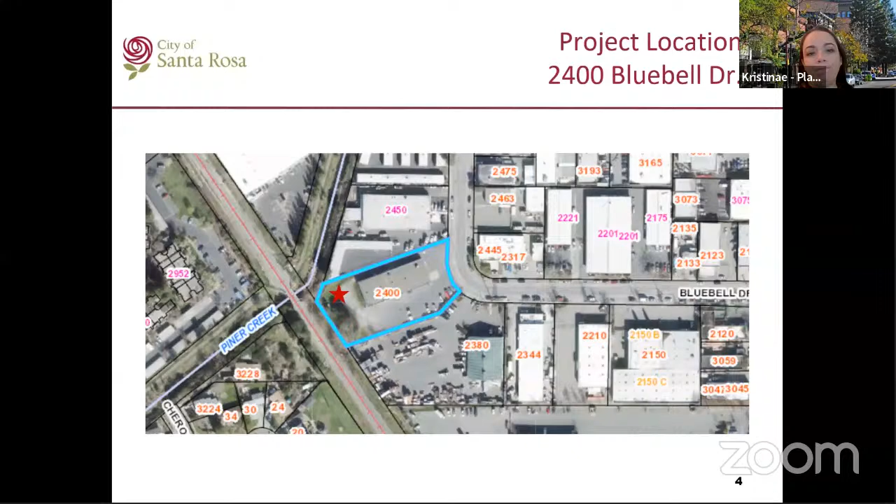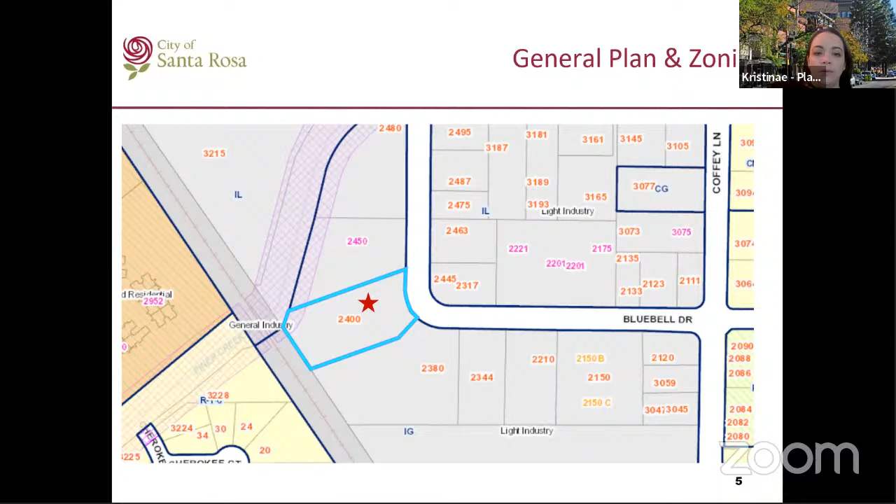A small portion of the lot is directly adjacent to Piner Creek, and the rear portion of the lot is adjacent to Smart Rail. The general plan and zoning for the lot and the surrounding area on the east side of the tracks is light industry and light industrial. Here's a close-up view showing the Piner Creek buffer.

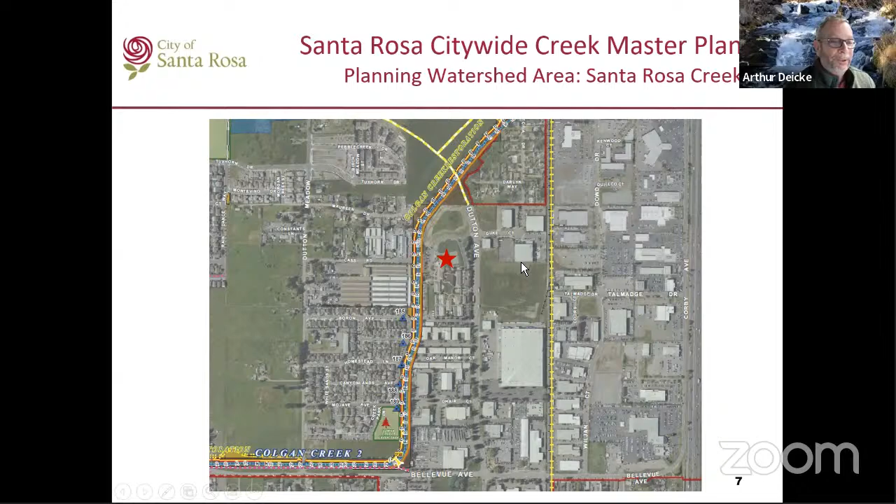And here is the... get this out of the way. The planning watershed area for the Santa Rosa Creek showing... oh, this is the wrong map, I apologize. There's Colgan Creek. Sorry, this is incorrect. So let me talk about Piner Creek Reach 2, which is directly adjacent to the project site.

It's designated as a modified natural creek, a modified creek and culvert consisting of approximately 7,430 linear feet. The creek is in a culvert from Highway 101 to Airway Drive, where it daylights as a modified natural type channel. Downstream of the confluence with the North Fork of Piner Creek, the creek is owned and maintained for flood control by the Water Agency.

Between Coffey Lane and the railroad tracks, the access road is not open to the public, and I don't believe there are any plans to open that anytime soon. Habitat enhancement is recommended throughout the reach, involving removal of invasive species and replacement with native vegetation.

Here's the applicant's site plan. It's showing the trenching for the underground electrical supply, and the equipment shelter would be towards the rear along with the cell tower. He's showing the Santa Rosa Creek.

Here's a little bit of a close-up. It's hard to see on this PowerPoint, but he does show a setback to the creek, to the fence of the equipment shelter. And I believe it's 25 feet, if I read that correctly, from the edge of the creek to the fence.

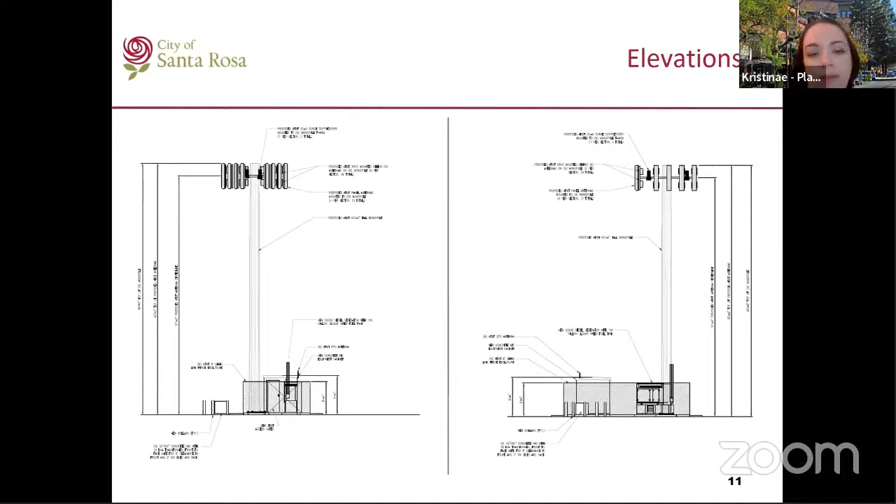And here is elevations of the proposed tower. It would be 60 feet tall with an antenna array. And you can see the equipment shelter below that would house a standby generator and various equipment that's needed to operate the tower.

So as I stated, there would be two opportunities for the public to comment and participate on this project. There's a major conditional use permit that the Planning Commission would review, and a major design review that the Design Review Board would review. And if you have any questions, I'm available to answer them. I don't believe my applicant is here, but I can relay your comments to him if he is not.

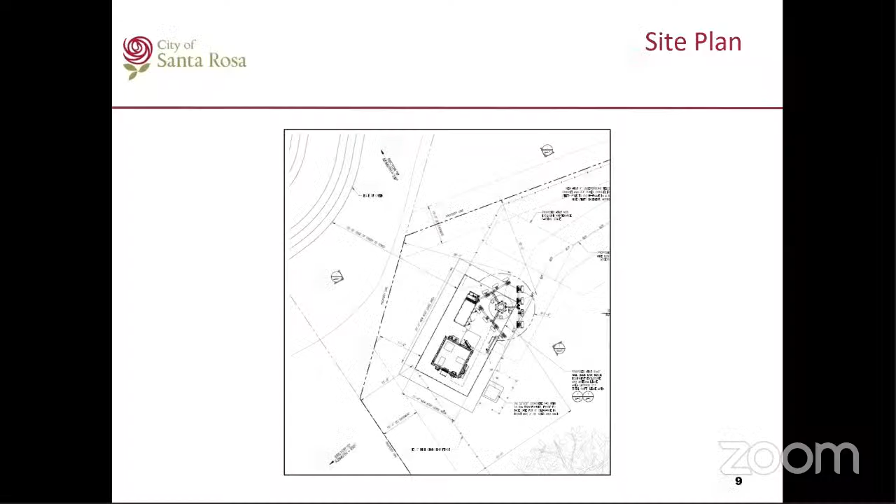Are you talking about the photo simulation? I'd like to see that because it wasn't in my packet. It's labeled the site plan, on page 9 of PDF page 9. Can we put that up? Let me get the actual plans rather than my PowerPoint. No, I want yours in this case because they don't match. Is this the one? That's not the one I have. Okay, can you go up one more? Just cycle through the slides until we find the one I'm looking for.

Yep, that's it. Okay, so it's labeled Santa Rosa Creek. Yes. So why is that? I noticed that too. This was prepared by the applicant, and I received it in just enough time, because his original site plan did not include the creek at all. So I guess my comment here is I'm a little bit concerned with the lack of detail and attention to detail the applicant has provided in relationship to the creek, which is what we're actually discussing today. So the creek is labeled wrong, and I don't know if they even have the right creek. And then this edge of the creek on top of the bank issue isn't resolved. So that's my first comment.

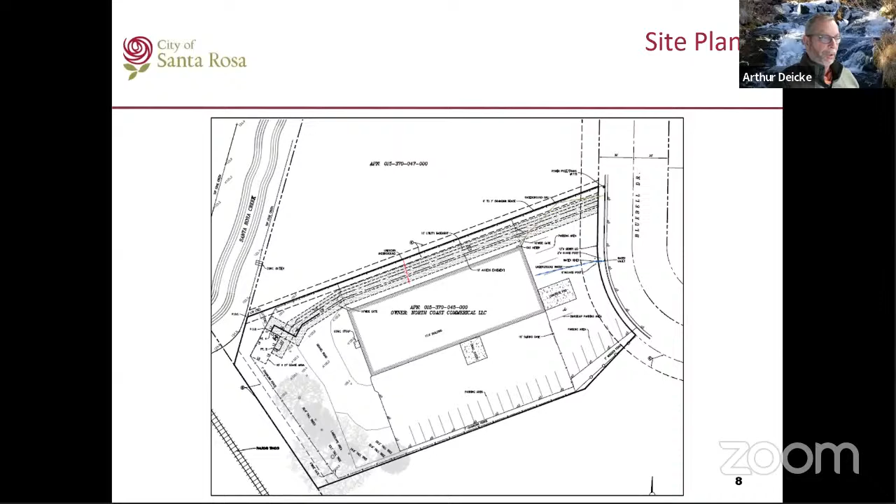Okay, well, those are my initial comments and questions. Thank you very much. Carol, did you still have a question?

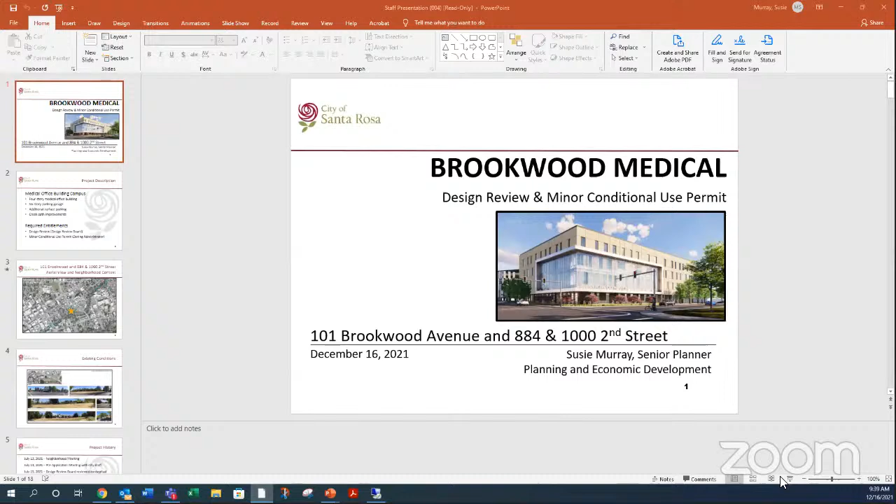The project before you this morning is the Brookwood Medical, a multi-structure project proposed at 101 Brookwood Avenue, 884 and 1000 2nd Street, occupying the whole corner parcel adjacent to the creek. The project proposes to construct a 4-story medical office building, a 6-story parking garage, additional surface parking, and creek path improvements. It requires a major design review before the design review board, and a minor conditional use permit, which will be considered by the zoning administrator.

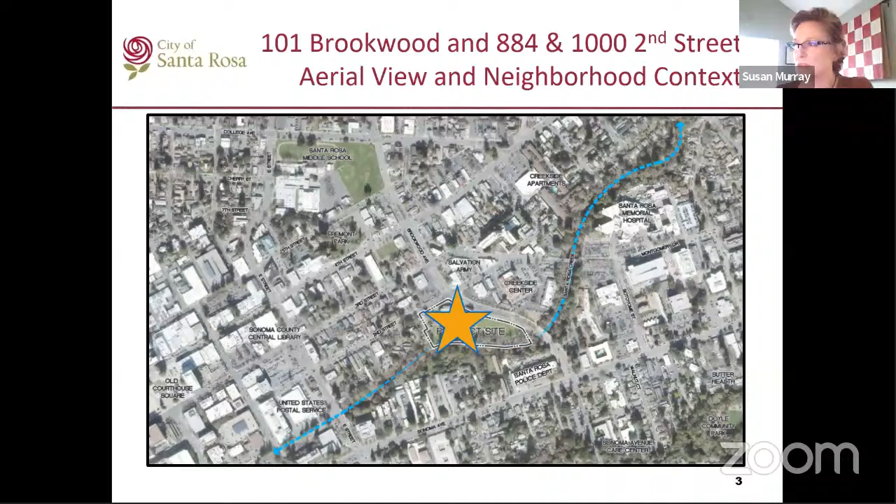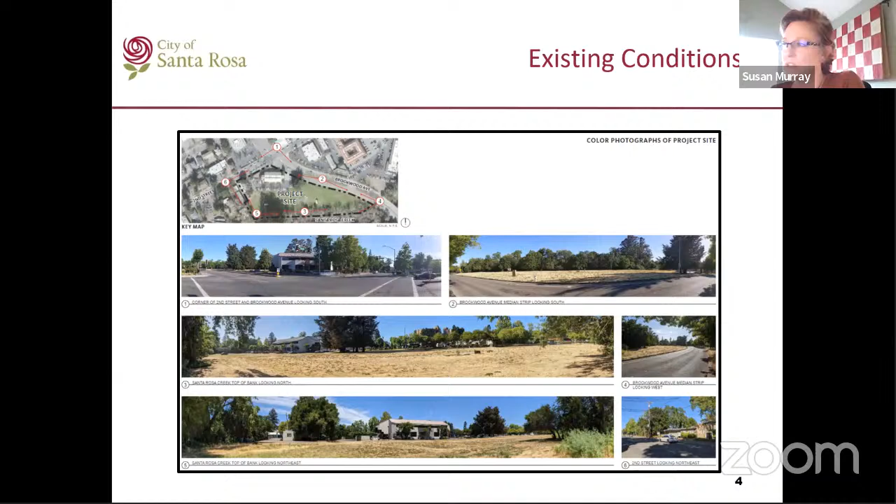The first time we really heard about the application, or worked with the applicant on this project, was through a series of pre-application meetings. The first introduced the project to the neighborhood, the second was meeting with staff, and the third was a concept review before the design review board.

The project that went before the design review board was a 3-story medical office building and a 4-level parking garage. The design review board provided quite a few comments, but I think their strongest comment was to go up. This is right on the edge of the downtown station area plan.

This is an area with a floor area ratio of 4, and the applicant has modified their project at the design review board's recommendation to go up over an FAR of 2, which is actually consistent with the general plan—it encourages projects to reach at minimum the center point of that floor area ratio. In October we received the formal applications, and today we're here at the Waterways Advisory Committee for recommendations and comments.

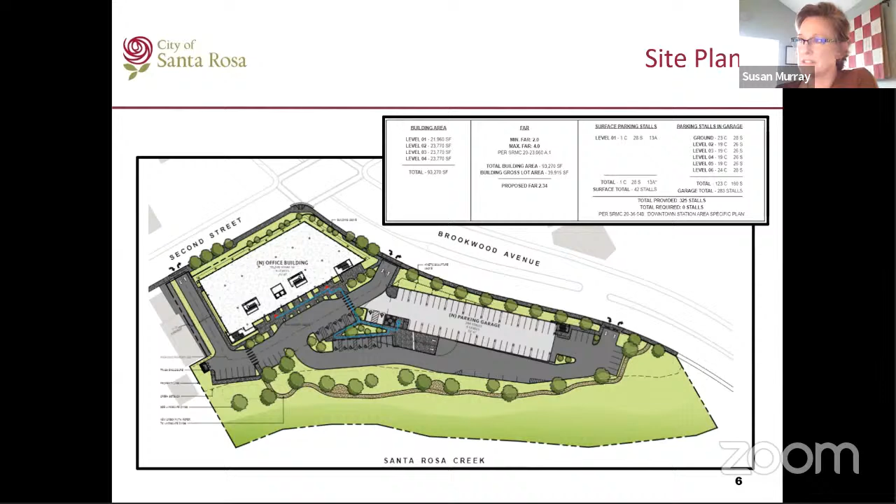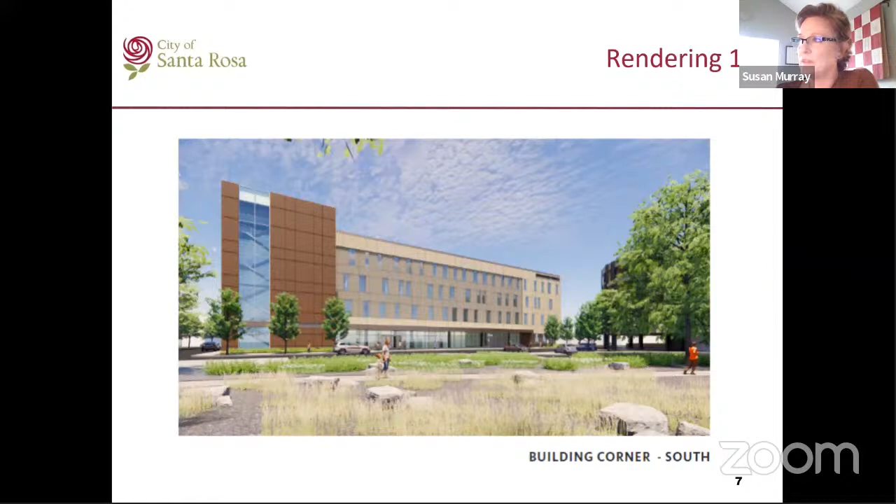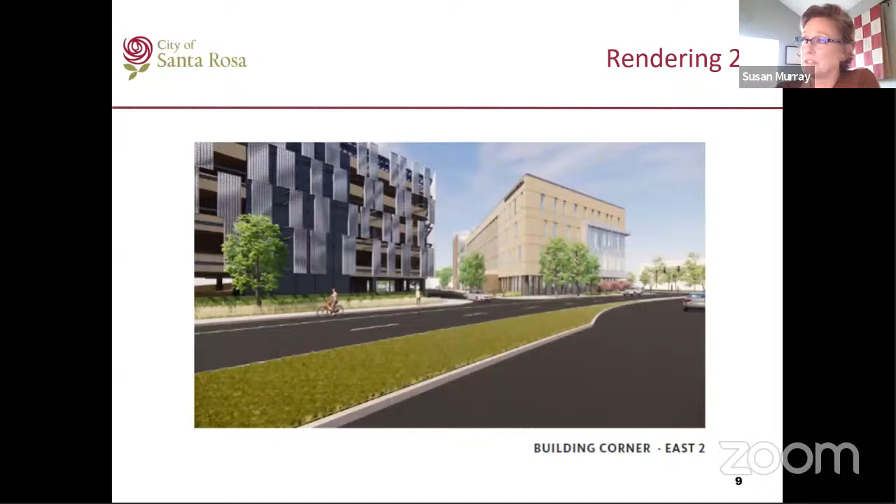So here is one rendering—again, I'll let the applicant talk to you about these. This is the actual parking garage. There's an image of both side by side.

The general plan land use designation here is neighborhood mixed use. It's in the NMU, neighborhood mixed use zoning district, and the downtown station area plan. It's also within a designated priority development area, established by ABAG, the Association of Bay Area Governments.

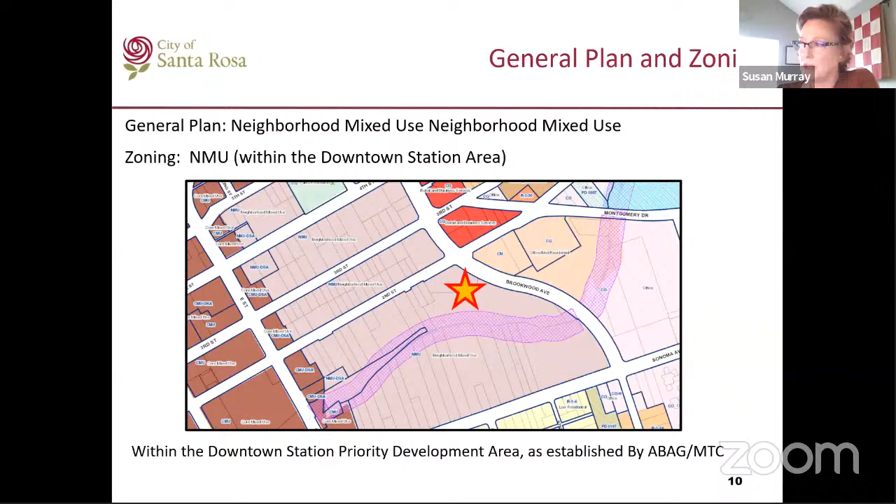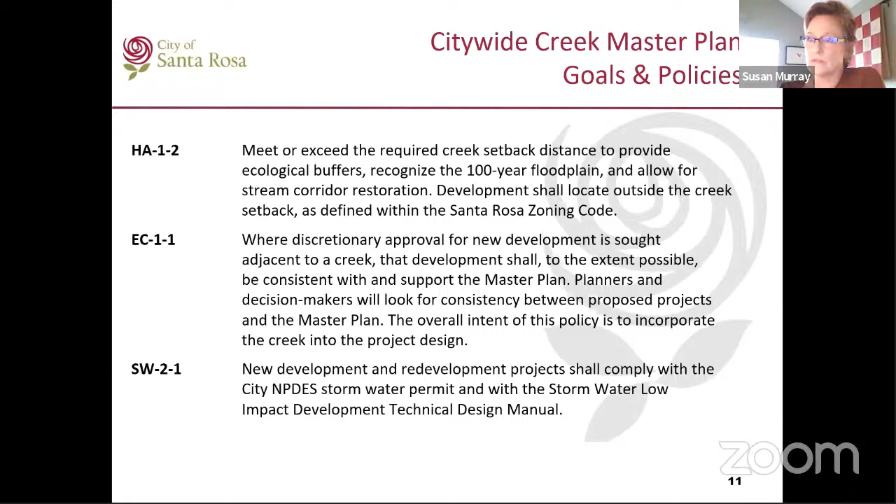The downtown station area plan and general plan have some overlapping goals and policies, so I just selected a few. Ensure that construction adjacent to creek channels is sensitive to the natural environment. Orient buildings towards the creek while providing privacy, security, and an open transition between public and private spaces. This is a challenging one on this site because we also want them to orient the building to the street. I'll leave it up for discussion with the applicant again.

New development along channelized waterways should allow for an ecological buffer between the waterway and the development. Again, they have met and exceeded the required setback. The buffer should also provide opportunities for multi-use trails and recreation. The site plan does include an extension of the creek path along the project frontage.

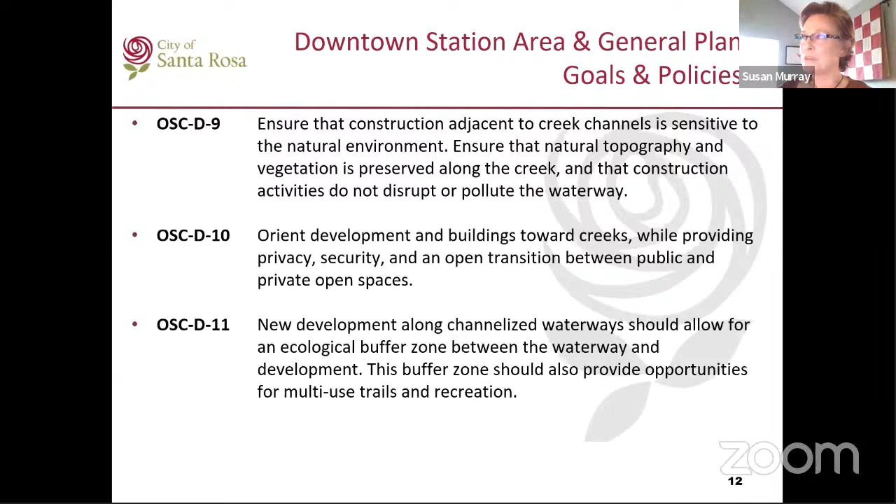I'm not going to go through and read all of the design guidelines, goals, and policies. There are some overlapping with the general plan and the station area plan, but I think this project is really supported by several design guidelines and implements several of the goals.

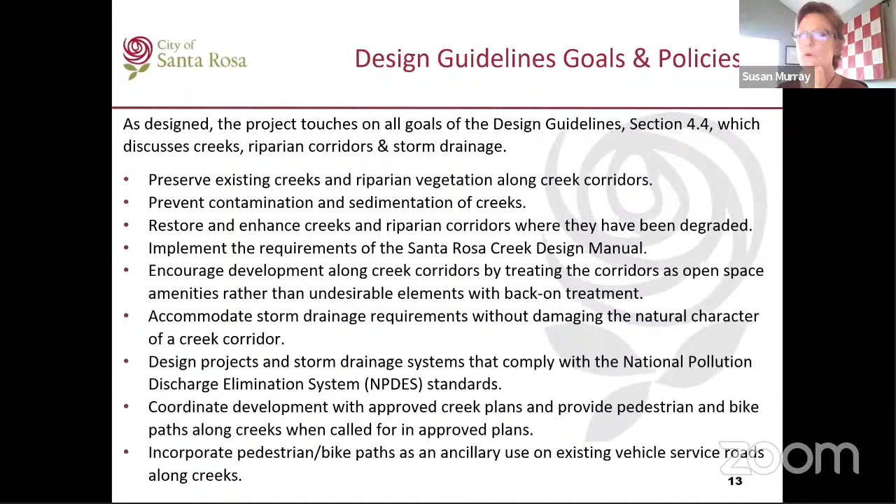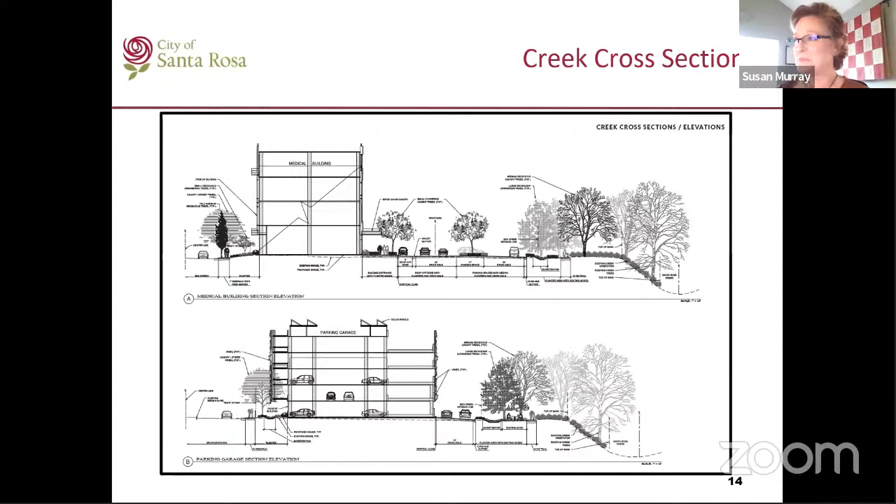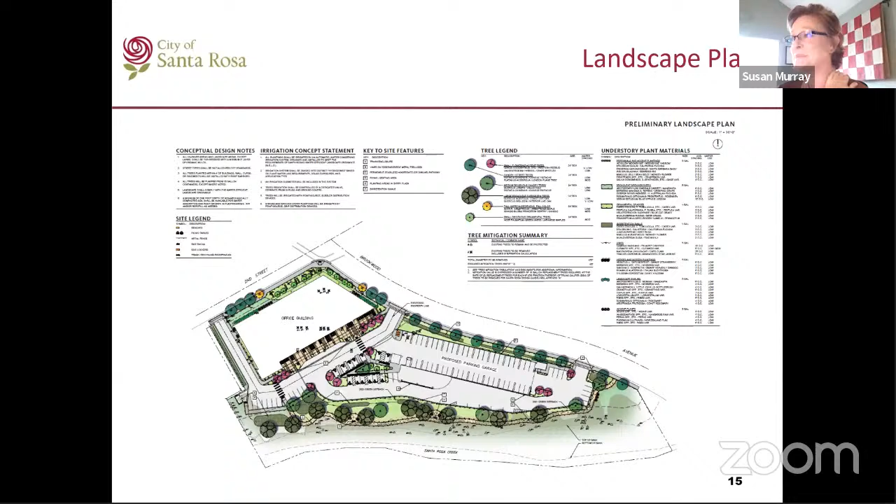So here are some creek cross sections. I did get a glimpse of the applicant's PowerPoint, so I'm going to defer to their engineer to discuss this with you. As for the landscape plan, the applicant team has the landscape designer on the call, so she'll be talking a little bit about this. And I'll defer to her as well for this very colorful plant palette.

It came to my attention that somewhere in my presentation or staff report there was some sort of CEQA, California Environmental Quality Act, determination calling this not a project. That is not correct. We have not made a determination on how this project will comply with CEQA, although I am quite confident that after staff's review, they will be eligible for a statutory exemption because they're within the station area plan and a priority development area, and have already received acknowledgement of that from ABAG, the Association of Bay Area Governments.

So with that, the Planning and Economic Development Department and the applicant request that the Waterways Advisory Committee provide comments for the Brookwood Medical Project proposed at 101 Brookwood Avenue and 884 and 1000 2nd Street.

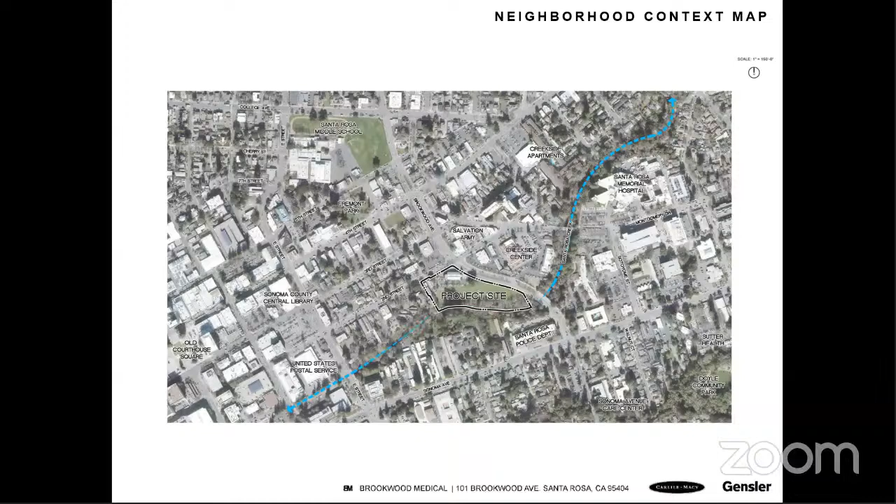So we already saw this, this is just the context for the project. And then again, looking at the policy context, the Citywide Creek Master Plan. This is our location on Santa Rosa Creek.

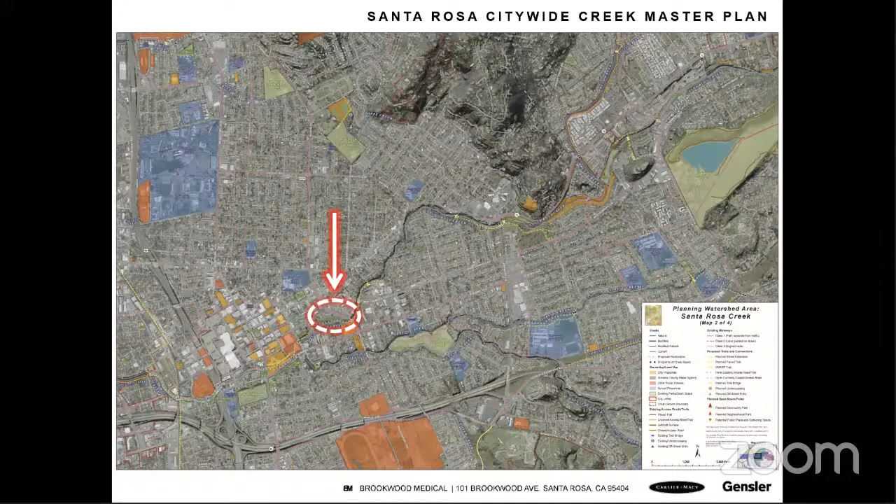This shows in more detail where we are, and essentially the plan is for a multi-surface path along the north side of the creek, or our side of the creek, if you will.

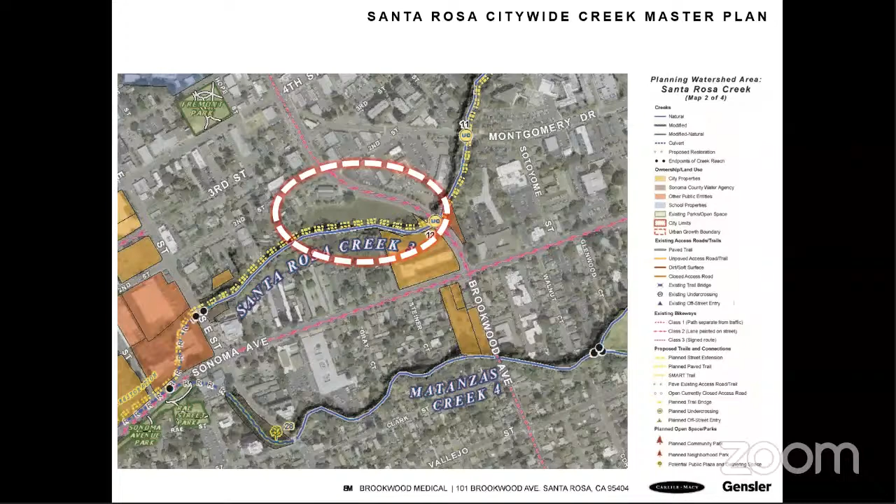Other policies are included in the Creek Master Plan. I should have highlighted in the second paragraph that this reach is recommended for preservation due to its natural amenities and value for fish and wildlife habitat, and recommended for enhancement by removing invasive species and replanting with natives. The part highlighted west of Brookwood shows the proposed paved trail would be on the north right bank side of the creek, which is our side.

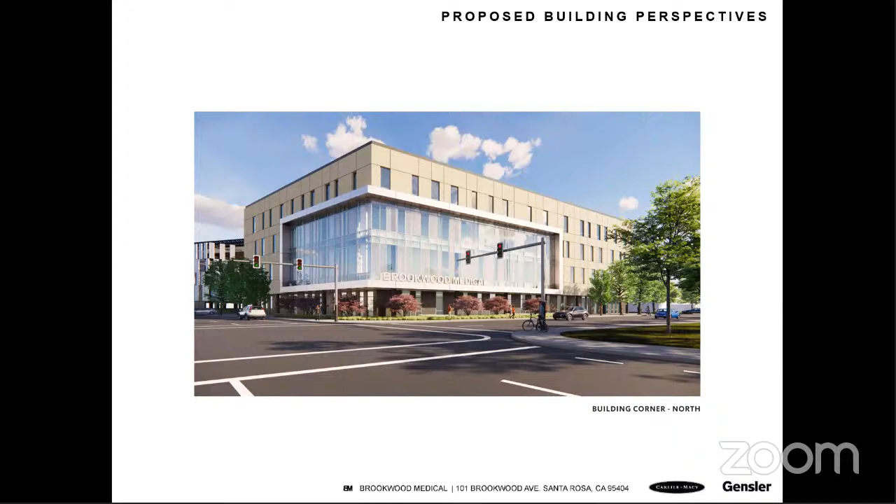Again, this is the view of the proposed 4-story building. We have been to the design review board for concept design review. It was suggested that maybe the building could be even taller, so this is in response to that—we're at 4 stories now. You can see in this slide the parking structure. While it sounds like it might be bigger, the levels are actually shorter, so it's shorter and we believe more in scale with the building than it might sound when you hear 6 versus 4.

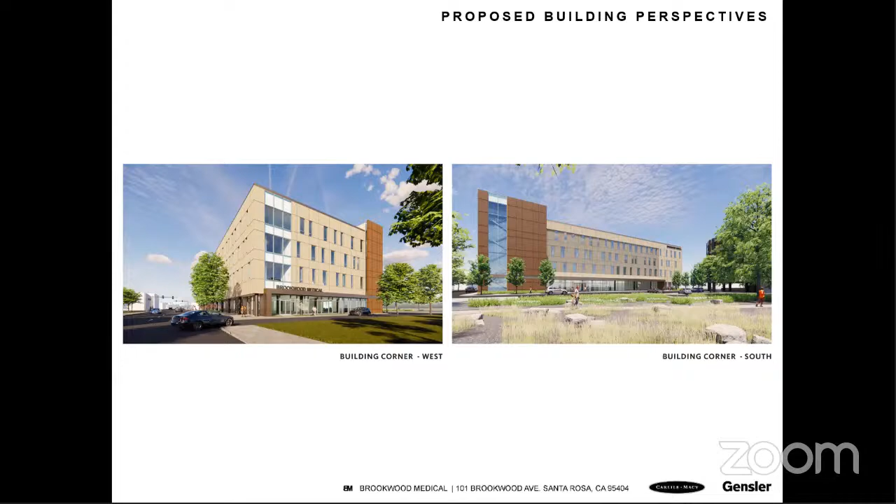Again, these are other images. The one on the left is looking easterly on 2nd Street toward Brookwood, so you're looking at the west face of the building. The image on the right is looking north, so you're seeing the south elevation, which would be the main entry for users of the medical office building from this side.

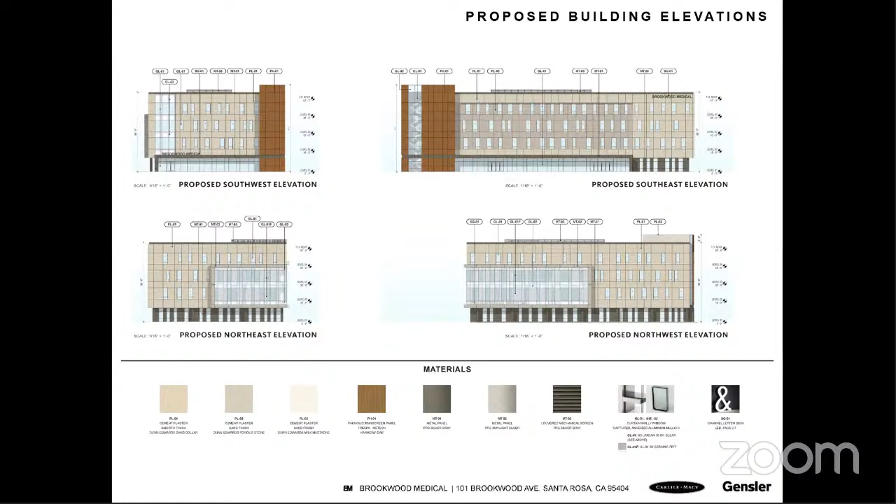These are building elevations. We can get into them if you're interested. I think the architects are online, but I don't know that this is really in the committee's area of interest.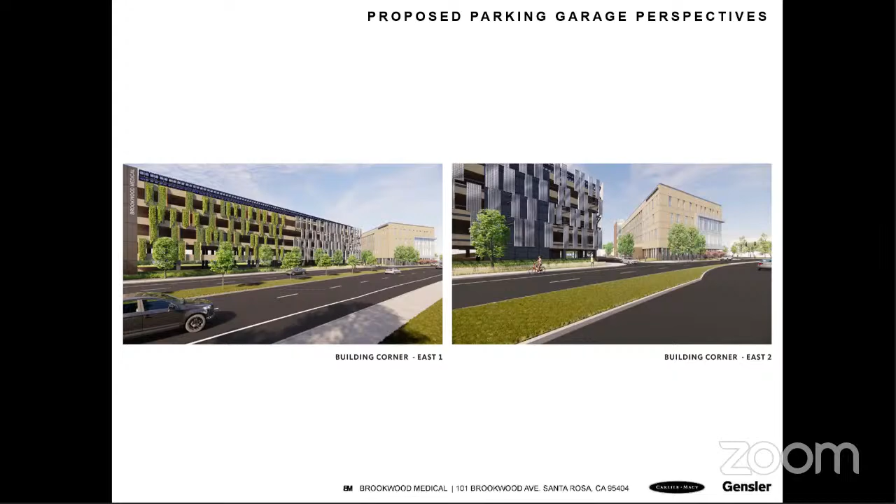These again are elevations of the structure.

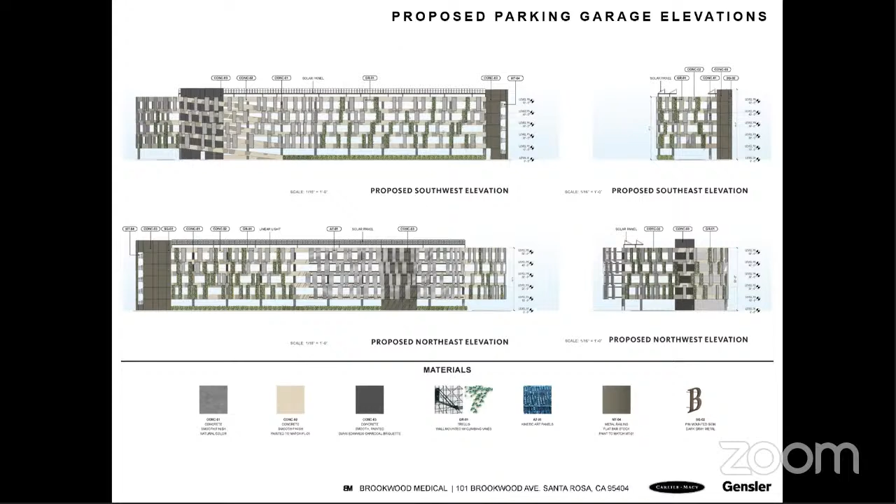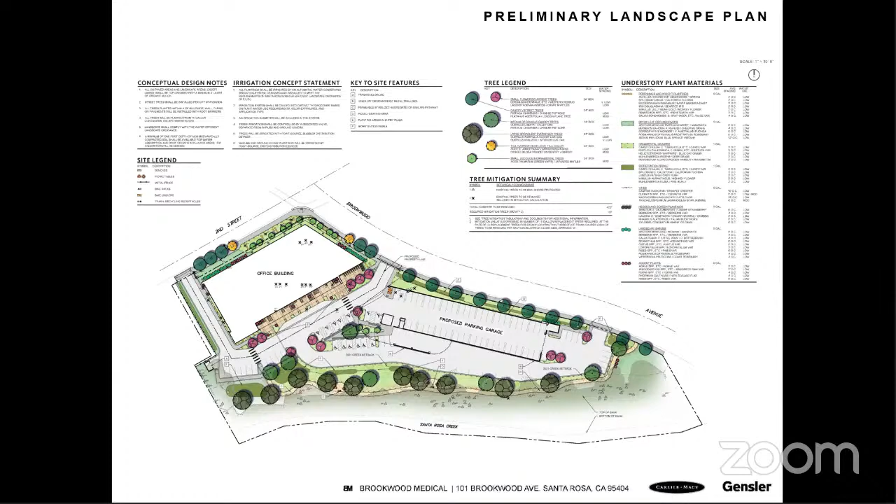Let's come back to the plan, since I can't really point here, let's go to the next slide, please. In the interest of time, I would have Brianna talk about this, but I'm not sure that we can switch back and forth very easily. And I know that Sherry— I'm right here, indicated. Oh, you can? Okay, go for it.

Hi, everyone. I'll just real quickly describe what we're showing here is the entry to the building, which we're trying to complement the architecture with. This entry, if you were to come out of the building, you're sort of looking at the creek, which I think is interesting to note.

There's a picnic node enlargement showing those little pop-outs with some seating that Kurt was describing. In this image, you can also see how we're trying to hug the top of bank and get into those trees without compromising them. The permeable paving and some of the seating and amenities shown is what we're proposing along the creek. The permeable paving is porous pave, which kind of has the look of DG, but it's entirely permeable, so water can just go right through it. We're also looking at some sort of steel and wood or steel tables along the creek with trash and recycling receptacles.

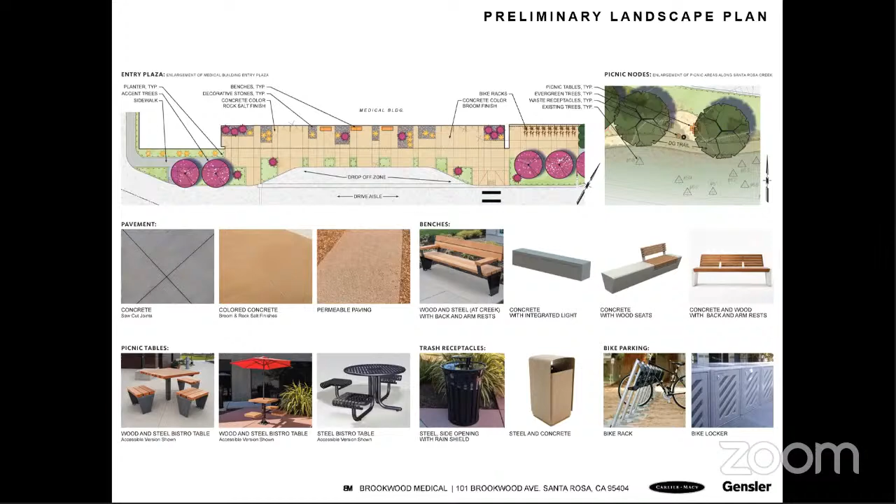Susie, can you go to the next slide? This is just to show the lighting of the building, and that we are proposing some bollards along the pathway, just enough to provide some security lighting or gentle lighting, but nothing really tall. It would all be bollard level.

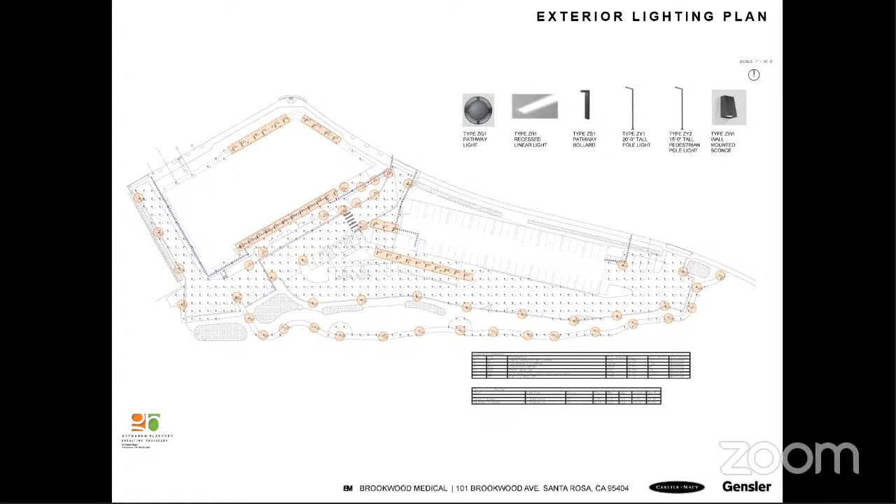Along the creek, we would be doing nothing but native plantings and trying to pull the creek vegetation into the site a little bit within that creek setback. All right, I'll turn it back over to you, Kurt. Okay, next slide, please.

This shows highlighted in red where the sections were taken that you saw earlier, the cross sections through the site. One goes through the office building, the line on the left, and the line on the right is taken through the parking structure.

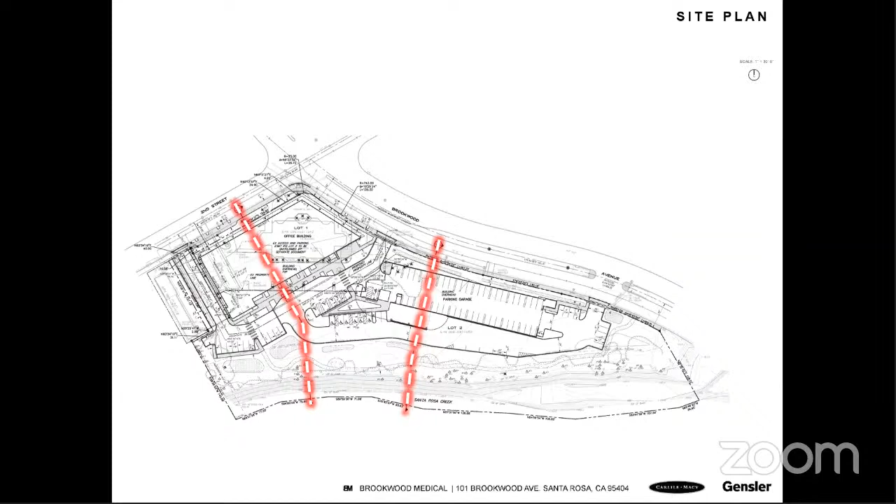Next slide, please. Here again are the sections. The top one is the section through the medical office building and out through the creek, showing where the bioretention areas are adjacent, the pathway, and a representation of some of the creek vegetation before you get to the creek. And then similarly with the parking garage.

With that, I think that concludes our presentation. I apologize for exceeding your 5 minutes. I was unaware of the time as we put this together, but I was hoping this would be helpful to the committee. So we look forward to your comments.

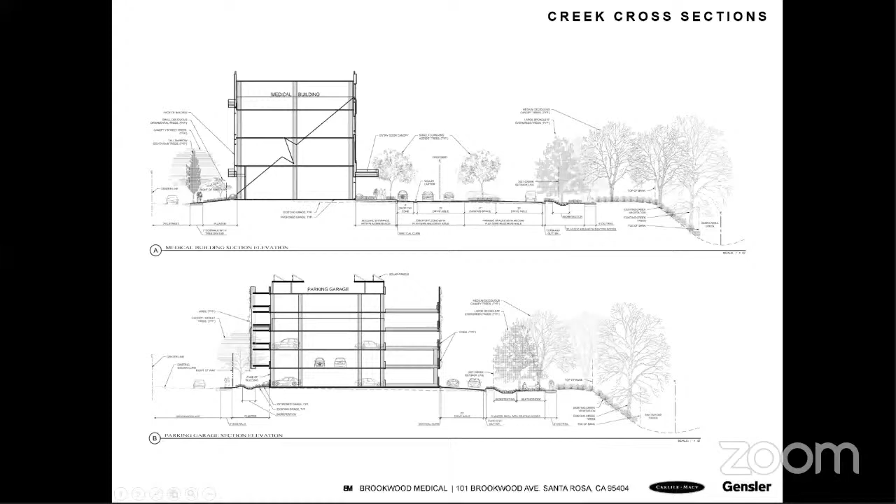Thank you, Kurt and Susie. This is very helpful information. And as soon as we get back to our committee and to our full screen, there we go, I'll ask if committee members have questions of the applicants.

Carol. I wrote down a slew of questions, and some of them may have been answered while I was writing them down. First, when I was down there, I noticed there are a number of eucalyptus trees on this property side of the creek. I'm wondering if those are going to come down or not.

Also, I was wondering if any of the large native trees on the creek were going to come down. You talked about a couple that may need pruning. You didn't mention any that were going to need to come down. I'd like to get that confirmed.

The garden really interests me, and there's a big push for pollinator gardens, and specifically monarch butterfly way stations. I'm hoping that the landscape architect is aware of this, and I couldn't tell if some of the plants were designed for their pollinator and monarch butterfly qualities, as well as the color palette.

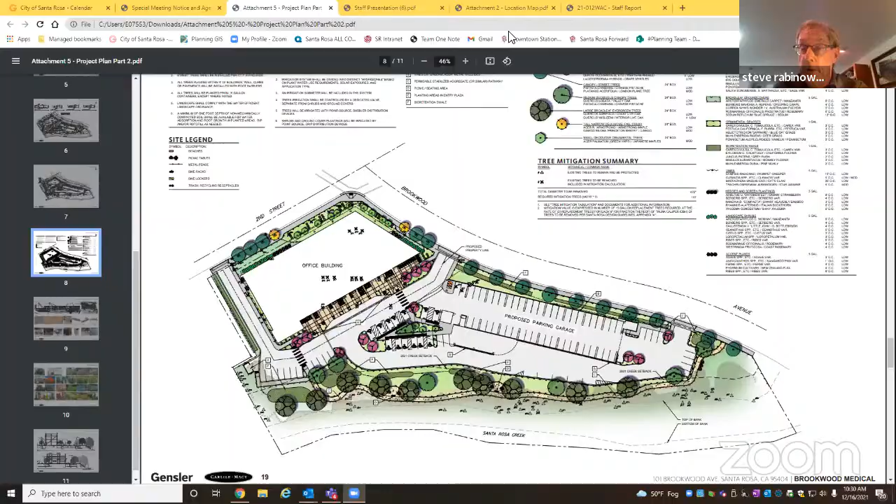Well, this is something the staff may want to consider. I think unless there are other questions by any committee members - are there any other before we go to the public comment? Okay.